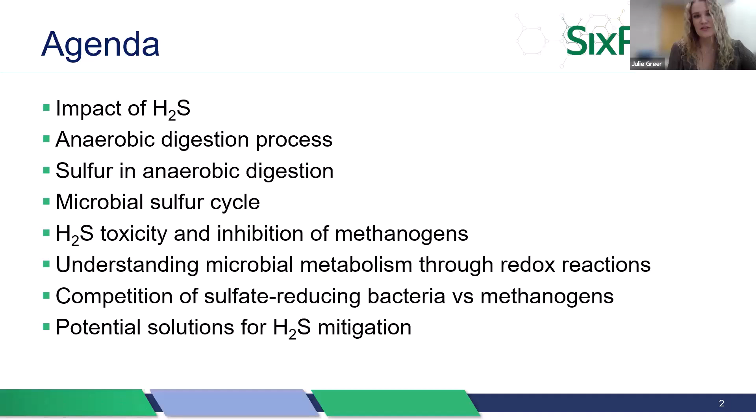So a quick agenda on some of the things that will be covered: a brief overview on the impact of H2S, talking about the anaerobic digestion process from a microbial standpoint, looking at sulfur in anaerobic digestion and how it gets in there. That's going to lead to the microbial sulfur cycle. Then looking at hydrogen sulfide toxicity and inhibition to methanogens, understanding microbial metabolism through chemical reactions called redox reactions, looking at competition of sulfate-reducing bacteria versus methanogens, and then wrapping it up with potential solutions for hydrogen sulfide mitigation.

So a brief overview: hydrogen sulfide in anaerobic digestion is something a lot of us are all too familiar with, for all the wrong reasons. Four major issues come with H2S production. For one, H2S poses significant health risks to both humans and animals. It can lead to severe health defects and death. What really makes it so dangerous is it will desensitize the sense of smell over time, and that's really going to cause long-term damage.

Second issue is corrosion. As hydrogen sulfide gas encounters water within your anaerobic digestion system, it's going to form corrosive sulfuric acid. That's going to damage the actual system itself—pipelines, storage tanks, gas collection systems, turbines. All of that is really going to lead to increases in your maintenance costs.

Thirdly, the odor. While it doesn't seem like as big of a deal, even at lower concentrations, that really pungent rotten egg smell is not so great for the appearance and the way that the biogas is perceived by the public. This really jeopardizes future initiatives to get more RNG projects down the pipeline.

And then lastly is, of course, low gas quality. Having H2S within your biogas lowers its quality and market value. You'll have to spend additional capital to purify it up to RNG, and this is really going to actually lower the energy efficiency of your system.

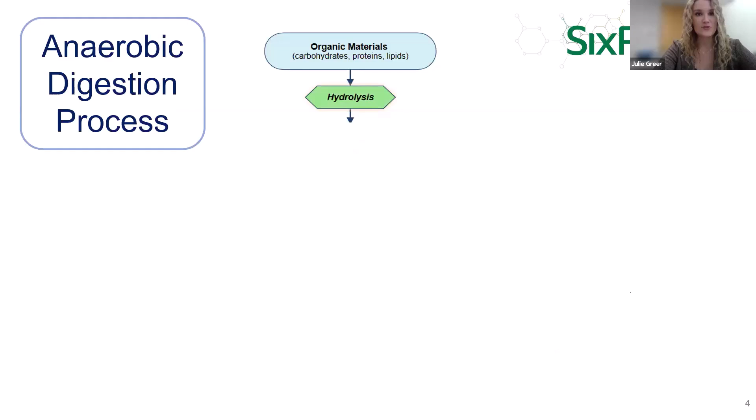These are going to undergo a hydrolysis reaction where they will be broken down further into more soluble organics—things like sugars, amino acids, fatty acids. Your soluble organics are going to undergo a process called acidogenesis, where they will be broken down into acetate, volatile fatty acids, carbon dioxide, hydrogen, and a few other gases.

So from your acetate, you are going to have methanogenesis happen. Methanogenesis is done by a group of methane-producing archaea, commonly misreferred to as bacteria. Acetate is broken down by methanogens, specifically acetoclastic methanogens, to methane and carbon dioxide gas. Now, carbon dioxide and hydrogen can also be converted to methane by another group of methanogens known as hydrogenotrophic methanogens.

So you can really see here that this whole process is linked through a kind of stepwise reaction, and there's going to be all types of microorganisms within this process that are all going to be cooperating and working together.

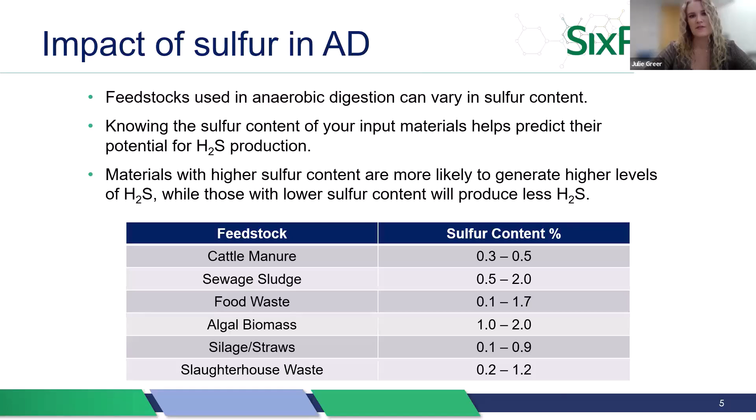So as you input your feed into your anaerobic digester, what you put in can vary in sulfur content, and knowing that sulfur content can help predict the potential for hydrogen sulfide production. Materials with higher sulfur content, like algal biomass, generally produce more H2S compared to those with lower sulfur content, such as cattle manure. This is pretty general—there are a lot of other factors that contribute to that. But overall, you can assume that a higher sulfur content in your feedstock will enhance the activity of your sulfur-reducing bacteria, leading to higher H2S production.

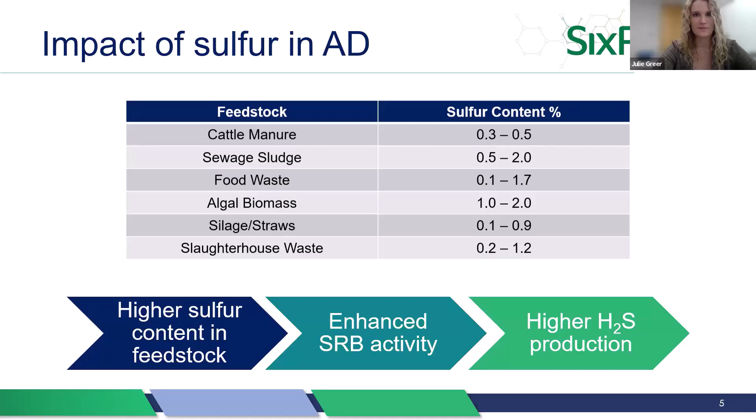So primarily the focus will be today on the SRBs, that second category, just because there is very minimal oxygen within an anaerobic digester for the sulfur oxidizing bacteria. The SRBs are going to be the organisms primarily responsible for your H2S production.

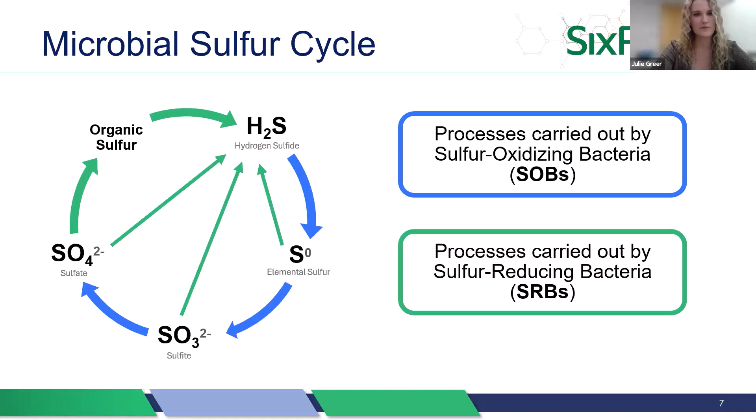Now that we know a little bit about the sulfur, we have to look at why H2S is toxic to methanogens. Methanogenesis is inhibited by hydrogen sulfide, with the degree of inhibition depending on the concentration, the environmental conditions, as well as the tolerance of the methanogenic archaea themselves. But overall, you can assume that more hydrogen sulfide generally means less methanogenesis. This toxic effect comes in a kind of twofold process.

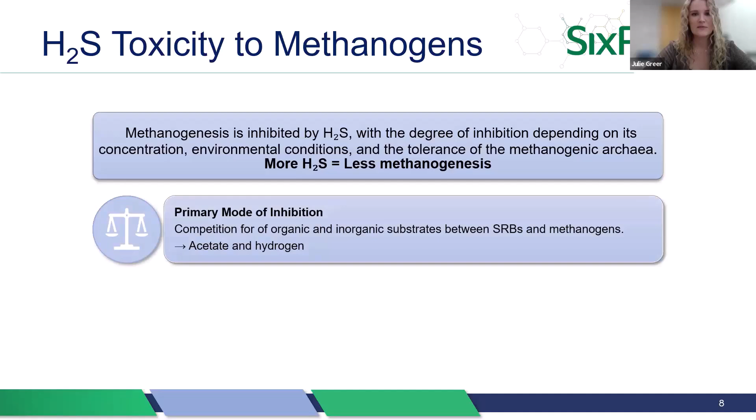The primary mode of inhibition is an actual competition for organic and inorganic substrates between the sulfur-reducing bacteria and the methanogens. These organisms compete for both acetate and hydrogen.

The secondary mode of inhibition is actually from the H2S itself. This molecule is highly reactive and can diffuse across cell membranes. This lowers the membrane integrity of the cells and microorganisms, denatures proteins, and inactivates enzymes. This doesn't just apply to methanogens, but all of the microbes within your anaerobic digester can be affected by this.

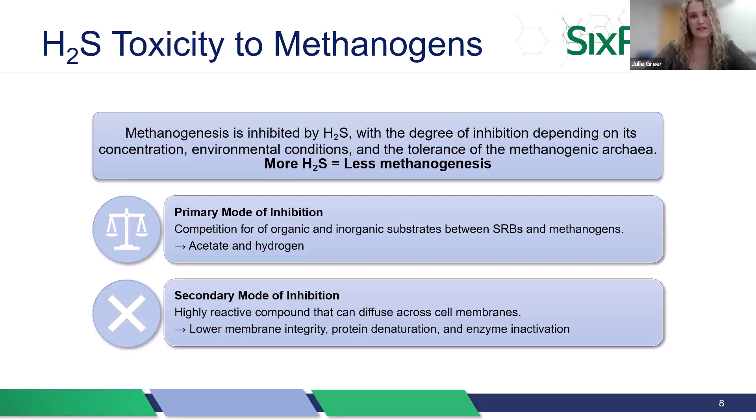To understand a bit more about the competition between sulfur-reducing bacteria and methanogens, we have to go back to kind of a chemistry 101 and look at microbial metabolism and redox reactions. Microbes produce energy through a process called cellular respiration, with reduction oxidation reactions.

When I say respiration, you can think of this almost quite literally. The way that we respire oxygen, you can think of these microorganisms as respiring different types of substrates. These reactions always occur as a coupled set, where one substrate is oxidized and one substrate is reduced. You can see the flow of energy here with those two reactions.

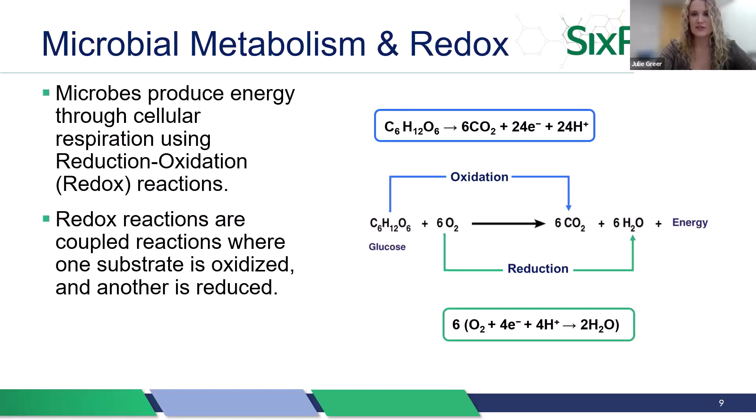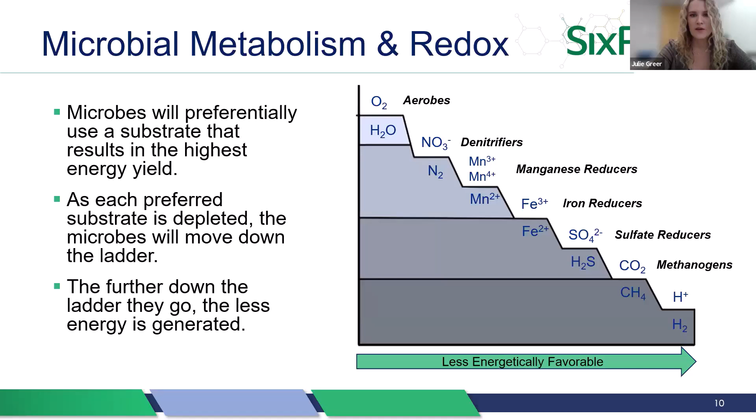If you wanted to put quantifiable values to these reactions, you can look at the redox potential—the energy potential that can be generated from these different reactions through metabolism. Microbes will generally prefer more energetically favorable reactions, using substrates with higher redox potentials, shown at the top here.

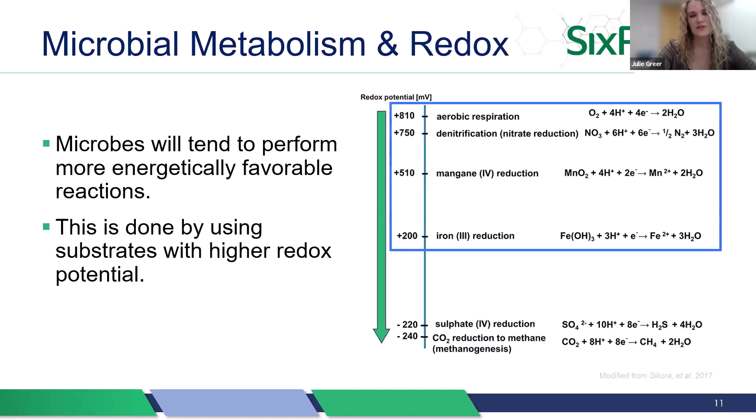That's not to say that the reactions shown at the bottom are not going to occur—they're just less energetically favored. But there are dynamic microbial interactions and different factors that enable these reactions to happen, such as adaptable metabolisms. Microorganisms can actually use different types of substrates, such as nitrate or sulfate, and there's also microbial niche differentiation.

So as one type of substrate is reduced in an area, then the next substrate that's available will be used by a different group of microorganisms.

Spatial stratification is another one. This is not as applicable to, say, an anaerobic digester that is being continuously mixed. But if you have a lagoon digester, for instance, what we'll typically see is zones where there are more of one type of substrate being consumed within that system. So you'll see a nitrate, sulfate, and methane zone.

And the last one is syntrophy. Just as much as these microorganisms are all competing and trying to consume the different substrates, they can actually cooperate together as well. For instance, fermentative microorganisms typically pair with methane-producing microorganisms where they're sharing the energy, so to speak. So the products from one group of organisms can be used as the reactants for another group of organisms.

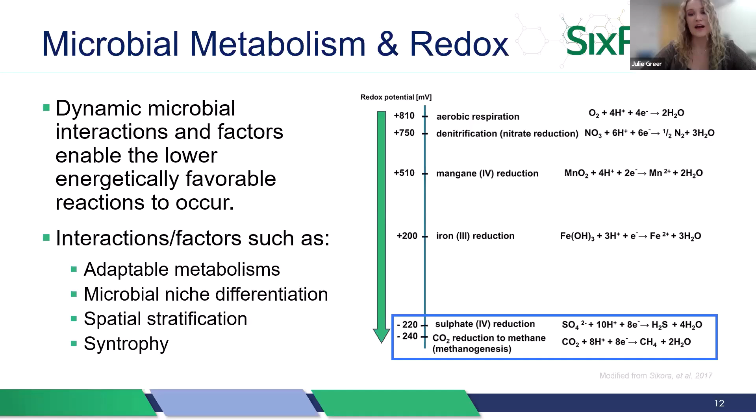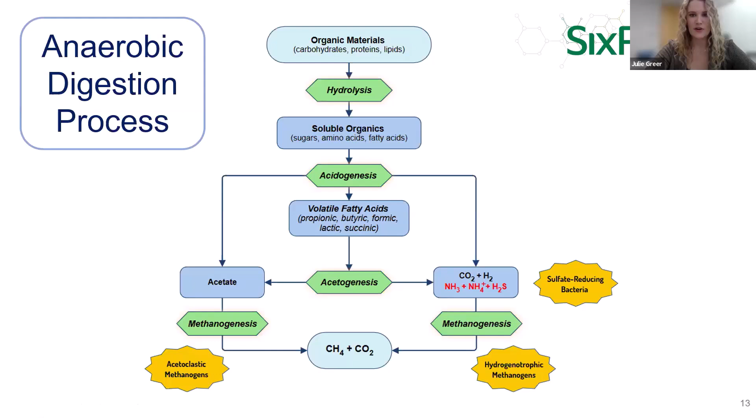So I'm going to bring you back to this anaerobic digestion process. We got a little bit about the metabolism, about the sulfur, and I highlighted earlier that you can see the gases where the H2S production is going to occur and where the methane production is going to occur. So this is where that competition is going to come into play.

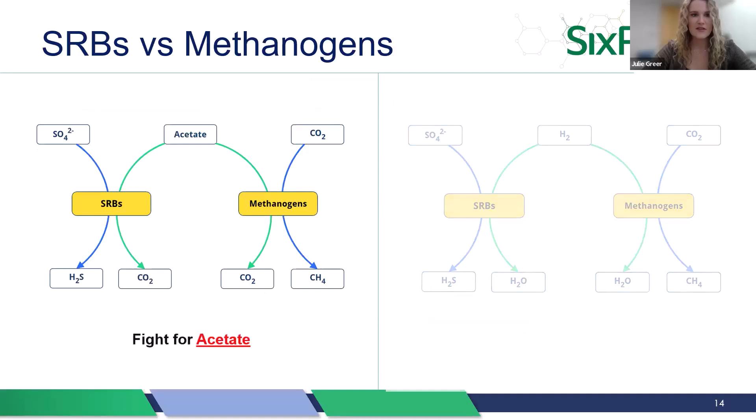I mentioned SRBs and methanogens will compete for different organic and inorganic substrates. Looking first at acetate, both methanogens and sulfate-reducing bacteria can use acetate as a carbon source. The SRBs are going to use it and it's going to be converted to CO2. The methanogens will use it to convert it to CO2 and methane.

Now the SRBs do have that leg up, so to speak, because they do have a more energetically favored reaction that's coupled with the acetate breakdown. And that is why they're going to outcompete the methanogens, so to speak.

Now the other reaction is through inorganic substrate competition, and this is going to be a fight for hydrogen. Similarly with the acetate, the sulfate-reducing organisms are going to have the hydrogen conversion to water coupled with the conversion of sulfate to hydrogen sulfide. And that reaction is going to be more energetically favored as opposed to the methanogens that are going to be coupling it with the conversion of CO2 to methane.

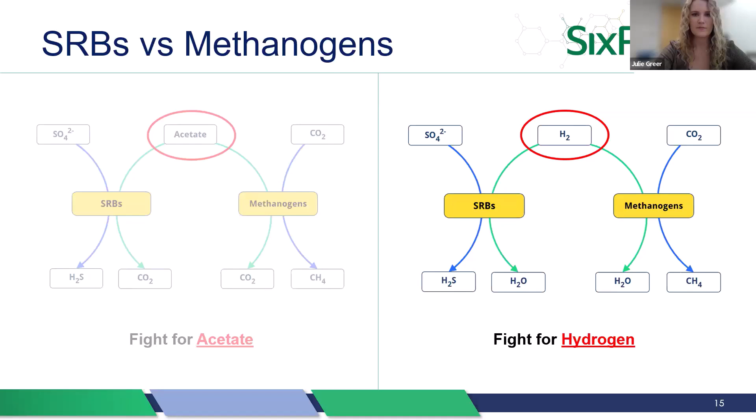So looking at all of this and what we can do about it, there's a few different options, starting with pretreatment. The first one being very obvious, we're going to avoid feedstocks with a higher sulfur content. Things like algae, grasses, silage, and straws typically do have more sulfur in it.

You can also do pretreatments of your feedstock to remove the sulfur compounds, things like acid and alkali treatment, oxidation pretreatment as well.

There are processes we can do during the anaerobic digestion to minimize the H2S, so maintaining neutral pH. It seems relatively simple, but methanogens are extremely sensitive to changes in pH, whereas something like sulfate-reducing bacteria is actually a lot more tolerable to, say, a change in the pH down to an acidic condition.

You can also increase the hydraulic retention time of your system. Because methanogens do have that less energetically favorable metabolism, they grow at a much slower rate than sulfate-reducing bacteria. So if you have too short of an HRT, it may not allow quite enough time for the methanogens to produce that methane.

You can introduce additives like iron scavengers that are going to react with the H2S. However, this could be introducing another problem in itself, because if you remember from earlier with that substrate ladder, iron is one of the substrates that microorganisms can use. So you might be introducing another problem while trying to solve one.

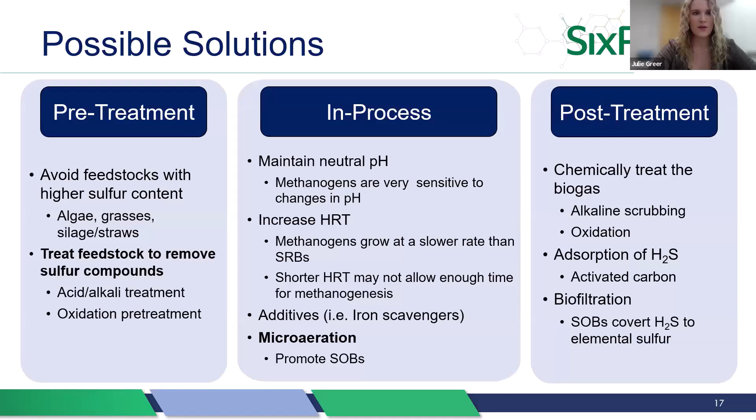So pre-treatment is something that we actually do here at SixRing. We take waste biomass, things like agricultural waste and forestry waste, and put it through a reaction that we call a delignification. This takes the biomass and breaks it down into two primary constituents, one of which is a very high purity cellulosic product that we call stimulose.

And the other is a liquid product that we call LHDO, or lignin hemicellulose depolymerized organics. Now the beauty of these two products is you can use both the cellulosic product and the LHDO, which can actually be upgraded to bioplatform chemicals.

So if you were to start with something like canola straw that has a sulfur content of 0.35%, and put it through this delignification process, you get this very high stimulose product that actually has a sulfur content of 0%. So you're effectively removing the sulfur and preventing a lot of that activity from the sulfur-reducing bacteria. Now, a lot of biomass pretreatments typically involve high temperature, high pressure reactions, but the beauty of our technology is it occurs under ambient conditions, room temperature and pressure.

And the chemistry that we use, we actually recycle all of the chemicals.

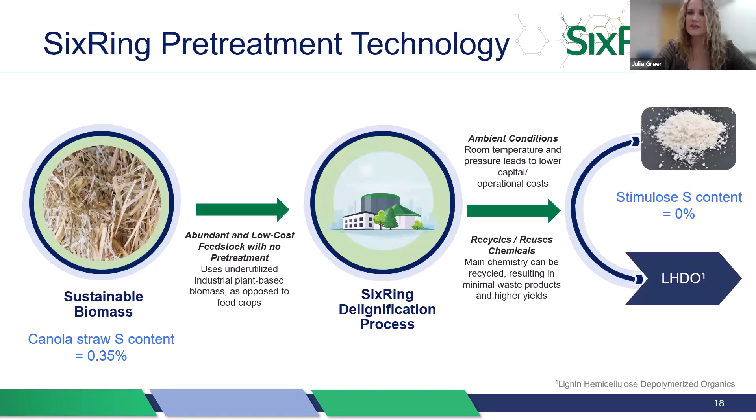So going from 0.35% to 0% might not seem like a significant change, but when we tested this in a 20-liter scale reactor, we noticed there was actually a decrease on average of 54% lower hydrogen sulfide concentration in this test reactor compared to the control, when we replaced an equivalent amount with the stimulose compared to canola straw.

Now, the beauty of this as well is you have a very high purity cellulosic product, and that's going to be a very readily bioavailable carbon source for the microorganisms. And when we observed this hydrogen sulfide decrease, we actually noticed also an increase in the methane volume production in the test reactor compared to the control.

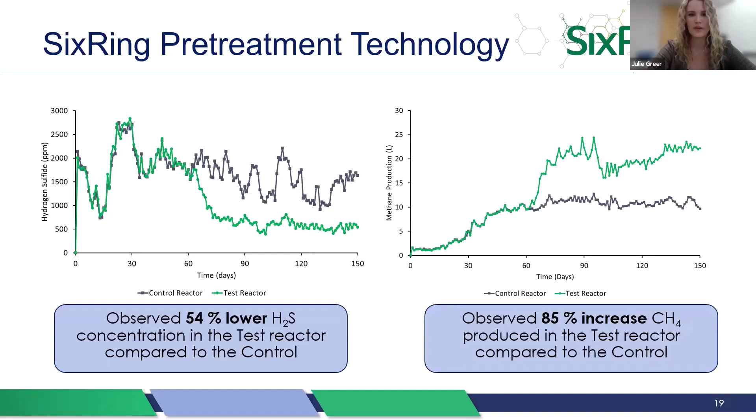So the last pretreatment I wanted to briefly touch on was microaeration. This is not something we do here at SixRing, but it is one of the few solutions that really tackles the root of the problem by looking at the redox and metabolism of the system. Introducing very tiny amounts of oxygen will inhibit the SRBs from reducing sulfate to H2S based on that redox ladder, and it will actually promote the sulfur oxidizing bacteria to oxidize the H2S to elemental sulfur.

Now, this method is very tricky because there's a very small window in which the conditions are optimal for the sulfur oxidizing bacteria, where your pH needs to be pretty much perfectly neutral, between 6.5 and 7.5. And the overall optimal redox potential of your system, which you can measure with an ORP probe, needs to be negative 250 millivolts. So it needs to be a very highly reducing environment.

The injected oxygen that you're inputting needs to actually be immediately consumed, so the anaerobic conditions are maintained. If you inject too much oxygen, you're going to cause a lot more damage to the microbial community. So that does make this treatment an operational risk factor, but it is one of the few solutions that really tackles the metabolism and redox of the system.

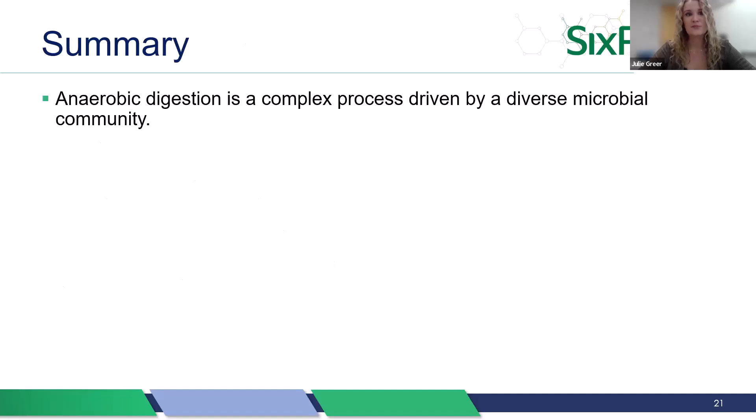So just to summarize everything I went over: overall, anaerobic digestion is a complex process driven by a very diverse microbial community. Microbes work in synergistic interactions where the products of one group serve as substrate for the others, and this is what enables efficient organic matter breakdown and biogas production.

There exists a competition and a cooperation between the different microbial groups, and this balance of competition and cooperation is going to determine the composition of your biogas.

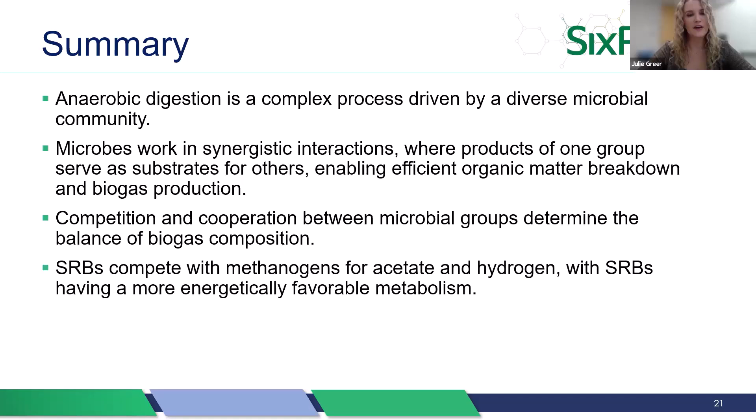Sulfur-reducing bacteria in particular compete with methanogens for both acetate and hydrogen, and SRBs have that more energetically favorable metabolism, which really gives them an extra boost and more favoritism in terms of producing hydrogen sulfide over methane. And lastly, and probably most importantly, understanding the biological processes behind hydrogen sulfide production is going to help identify its root causes and develop targeted solutions to mitigate the effects on anaerobic digester systems.

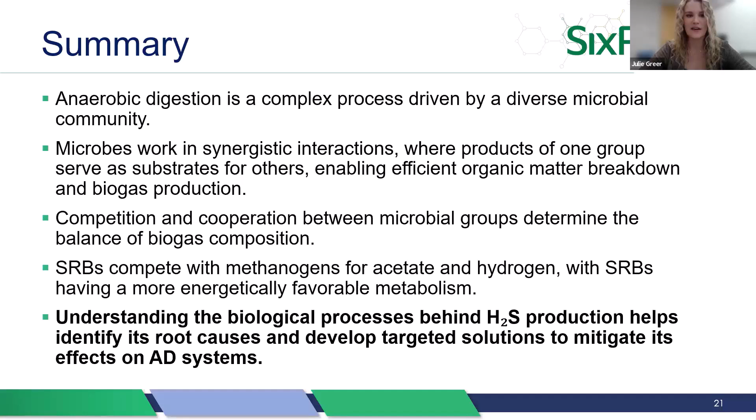Appreciate it. Awesome job. I'm still amazed the more I learn about what happens when you put sulfur into a reactor. I used to just think it was an H2S scrubbing problem, but the notion of it being something that reduces your biogas yield because the SRBs are soaking up all that carbon - I'm still wrapping my head around all this. So great job. Thank you.

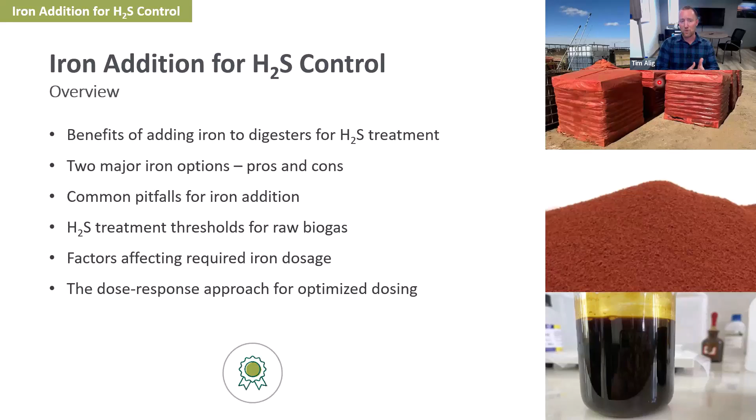But also cost efficient - we don't want to overdose a bunch of iron, not only for cost reasons, but also potentially, if it's bad enough, for chemical reasons as well. So dose response, going to talk about that a little bit. And then the major iron solution that Planet provides for in-digester H2S treatment is MicroNOX ON16, a micronized powder that's very effective when it's applied the right way.

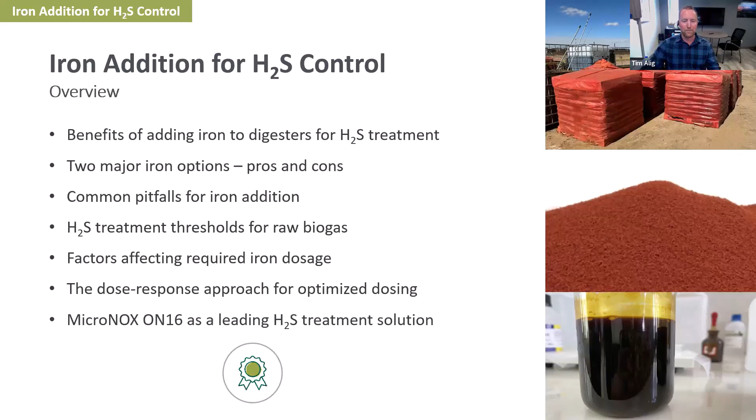Starting with why - the big thing is it's treating H2S generation at the source. As Julie pointed out, we have that sulfate transition to H2S in the digester. We want to have a good capacity to reduce H2S in situ in the digester so we don't have quite as much work downstream with carbon tanks, biological desulfurization, and chemical desulfurization after the digester gets going. So very important for many people out there.

It really just makes sense to treat H2S effectively in the digester before taking a lot of the remaining H2S downstream of that. It can prolong the life of equipment, especially stuff that's susceptible to H2S corrosion or that sulfuric acid corrosion that Julie mentioned - activated carbon and other media, we want to prolong the life of those. We can very quickly burn out things like activated carbon if we don't keep H2S levels under control in the raw biogas. So huge value there, treating H2S at the source.

Biological health - a lot of this comes back to what Julie mentioned, she did a great job talking about this aspect. H2S toxicity is a really, really big one, and there's also this ongoing balance between the sulfate reducing bacteria (SRB) and the methanogens over time - it's just this constant war in the digester. So we want to bind sulfur, we want to treat H2S, we want to keep those methanogens very happy so they don't have a difficult time keeping up with the SRBs, which could win the war from time to time and create these big blooms, these big spikes in H2S.

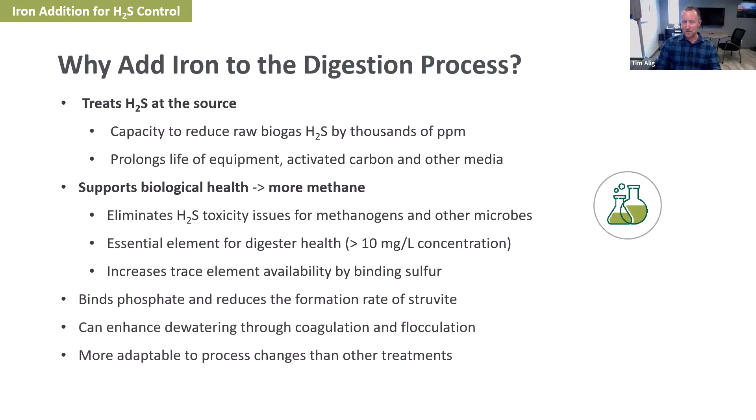For people with struvite formation issues, which can be a huge pain point for clogging pipes and equipment, iron can bind phosphate and reduce struvite formation, so that's a big value add. It can also enhance dewatering through coagulation and flocculation in certain applications. And it's potentially more adaptable to process changes than other treatments, since it can be dosed at a varied rate to keep up with H2S in a timely fashion.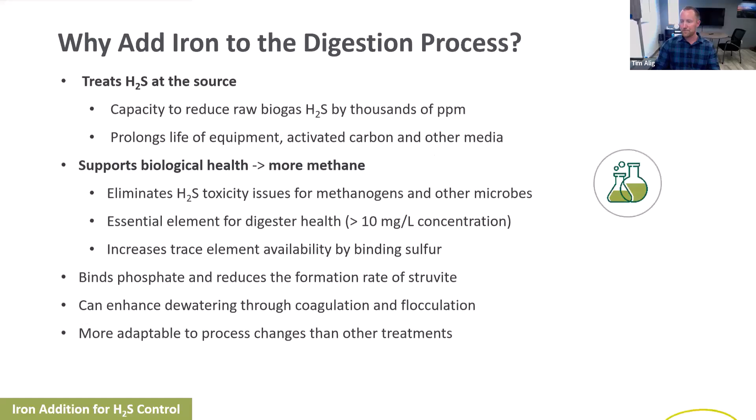The first solution I'll highlight is ferric oxyhydroxide, also called ferric hydroxide or iron 3 hydroxide. This comes as a ferric-rich powder or granular form, added either upstream or directly to the digester.

Pros of this one: it's not corrosive and safe to handle. There's potentially some powder and stain risk, so you want to be careful not to breathe it in, but otherwise it doesn't have corrosive risk like ferric chloride. You can apply it by hand in controlled amounts, or by machine if you have a good mixing system and good ability to inject it in a dosed form.

Another big point is it has a moderate reaction rate. It's not initially soluble, it's kept in suspension in the liquid or substrate. Over time, keeping that moderated iron concentration in the digester helps buffer against H2S spikes that could pop up as certain feedstocks come in, or with sudden changes to the biology that result in increases in H2S.

On the con side, it's really important to keep it mixed into suspension. Many folks have had issues with it dropping out if they add it way upstream of the digester, like into a big stagnant manure pit or other liquid pits that don't get mixed well. It has some weight to it and is not initially water soluble. It will eventually solubilize and react with sulfur, but you need to keep it in suspension until it has a chance to react with sulfur in the digester.

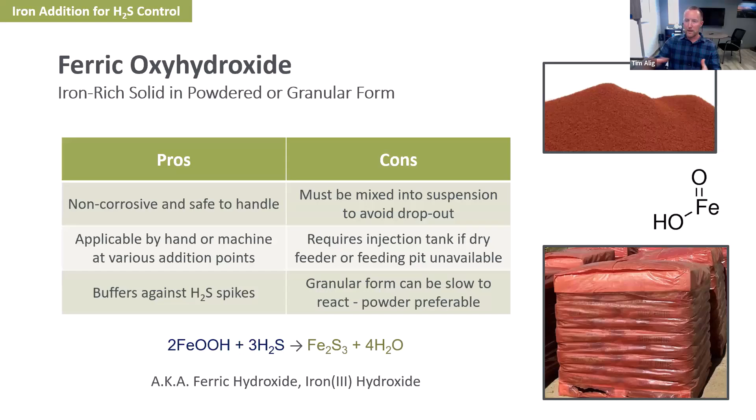So it's very important to have the right equipment, or at least the right addition point, to make sure it's effective in the digester. A dry feeder or feeding pit right next to the digester can be a great way to get this powder or granules in. You'll need a dedicated, at least small-scale, mixing and injection tank specifically designed to get that ferric oxyhydroxide into the digester. The granular form can be slow to react depending on the surface area to volume ratio of the iron, so oftentimes a powder is preferable—the increased surface area improves the chance it gets effectively transferred into the digester and reacts with sulfur there.

Ferric chloride is a very common treatment. On the pro side, it reacts very quickly with H2S and is very soluble in water or liquid, so as a liquid solution it's ready to inject.

The big con to really highlight is the corrosion risk. A lot of safety equipment is required to do this well—things like eye wash stations, safety showers, and good chemical containment in case it spills from its IBC tote or leaks from plumbing. You need to be very careful and think preemptively about what this looks like in a biogas plant, because we've seen major leaks that were a huge pain point to clean up, with some safety hazards associated. You really need to manage the corrosion from the acidity, since it forms hydrochloric acid when mixed into solution—so keep that top of mind and have good equipment and forethought around it.

There's a cost, of course, associated with that. And I mentioned the spills and leaks can be a major safety issue. But this one can really make sense in certain applications, especially if you need just kind of a ready to go liquid dose for certain applications.

Common pitfalls: I mentioned that risk of adding too far upstream. Ferric chloride can precipitate out, form different precipitates with chemicals, depending on the pH and what's contained upstream of the digester. So you can lose ferric chloride upstream. You can also lose ferric oxyhydroxide if it happens to just fall out of suspension, if it's not mixed well, if it's not pumped well.

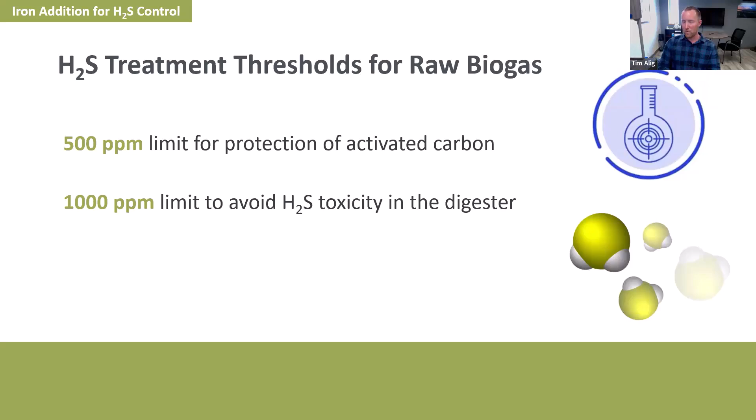Dosage range, this is as far as just in the form of ferric iron atoms, so 1.3 to 4.5 pounds for every pound of H2S. Any supplier of a product, whether it's ferric chloride, ferric oxyhydroxide, etc., should have some type of recommendation for what that dosage rate of their particular product is for a given amount of feedstock or a given amount of sulfur or H2S. So start there, definitely start with that recommendation, and it will definitely need to be adapted to your particular system, but always seek that information early rather than late. Try to get at least some recommendation for what that dosage rate should be for your particular substrate and system design. Manure is often going to require more iron than other substrates.

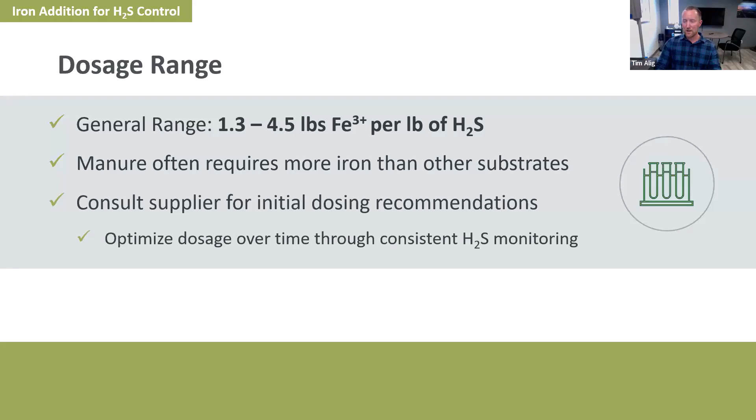Julie got into this a little bit, but there's definitely exceptions. There's going to be substrates out there that just have a heck of a high sulfur content. Could be local farming conditions, could be the domination of certain substrates in that overall feedstock. But you'll often see a little bit higher requirement on average for manure with high sulfur coming in. And as I mentioned, contact the supplier for initial dosing recommendations, and what I'm going to get into next is optimizing that dosage after that starting point.

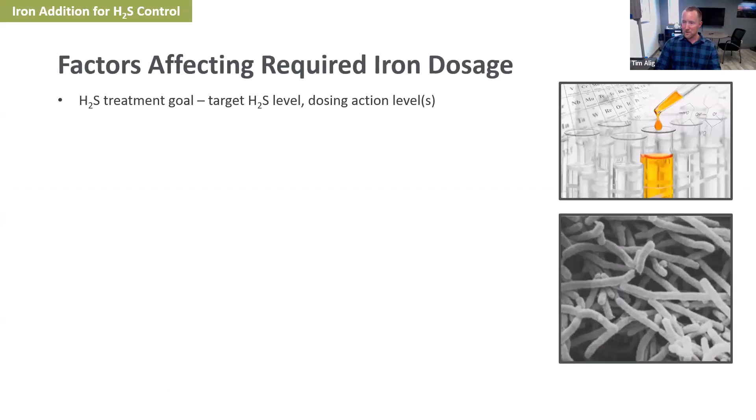Factors that affect that required iron dosage: we have that treatment goal, this is going to be facility dependent. What are we trying to achieve with H2S treatment? The form and concentration of iron, how effective it is at the particular location that you're adding it at. Want to make sure that we're getting it into the digester effectively, but if we're not, that could greatly expand the amount of iron required to get it in and reacted with H2S. And then that mixing efficacy at the addition point within the digester.

Substrate quality and feed rate, we could see some H2S formation lag behind that initial feeding. It does take time for sulfate to form and get converted into H2S in the digester, so there's a time factor there. pH, kind of that equilibrium between H2S and other forms of sulfur. Temperature, including the stability of the temperature. Plenty of cases where you have temperature fluctuating in the digester and the methanogens are not as happy. The sulfate reducing bacteria can outcompete in certain cases, so that will affect how much H2S forms and how much iron is required.

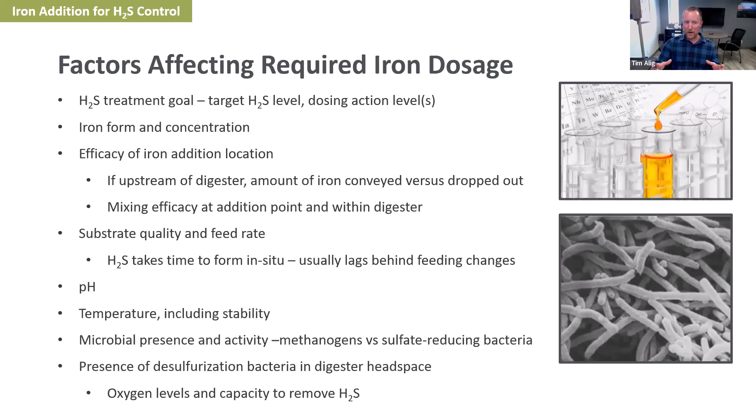Microbial presence and activity, again, that population of methanogens versus sulfate reducing bacteria. Presence of desulfurization bacteria in the digester headspace. This is part of that micro-aeration, at least one option as far as micro-aeration solutions that Julie mentioned. So we might need to figure out how much do we want to treat in the digestate versus in the headspace.

Big star highlight on this one, this dose response approach. So I mentioned starting with that recommended dosage with some good consultation, a little bit of research on how much we should approximately start with for our new system here with its given substrate, its given conditions, the maturity of the digester, how far along it is with its microbial health and methanogen activity. So we're going to start with that estimated iron dosage. We want to keep it steady. We're trying to build some data here to see what is the actual response of H2S to this sustained iron dosage.

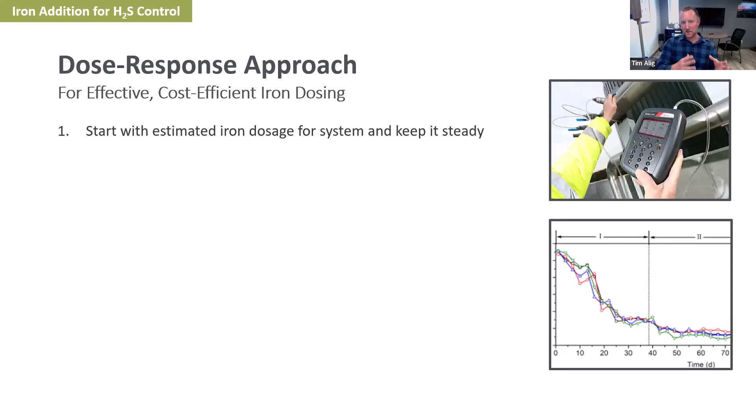To make that happen, we need to make sure we have at least daily measurements of H2S, at least daily measurements of iron addition, in addition to other health parameters like pH, temperature, methane. We really need some kind of, hopefully a one-page review or nice overview of what's happening day to day in this system and what's that dose response effect between iron and H2S. So we need some kind of data compiled somewhere we can look at all this together. We want to gradually adjust that nominal dosage rate over time. It's going to be a gradual effort until that H2S is right at or right below that target level. This is kind of the interest, both catching that H2S and making sure we don't have cost efficiency issues. And we want to continue to record H2S levels and iron treatment quantities daily.

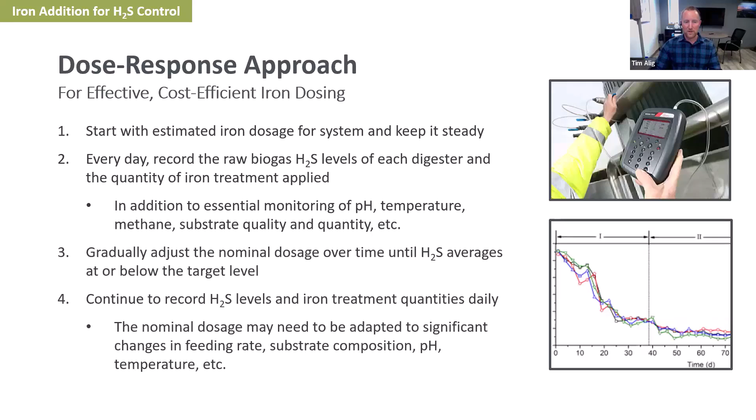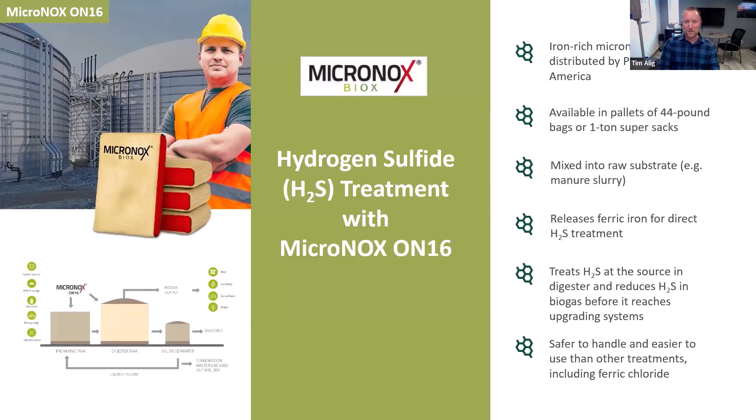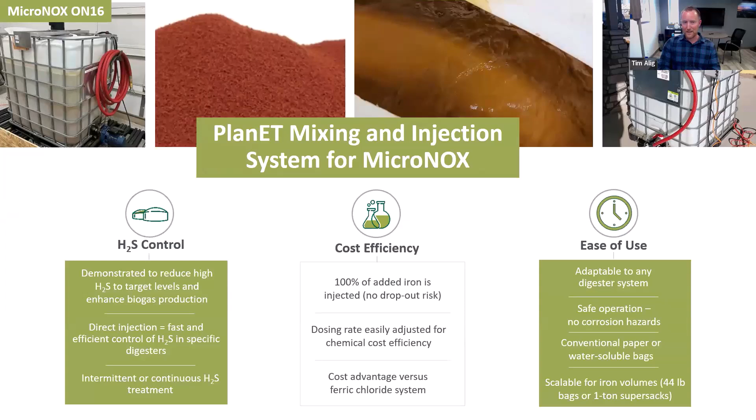One of the really exciting things we've got recently is we've released our own version of a mixing and injection tote for direct injection either into manifolds or directly into the digester. We can really work with your specific system design to make this a good, effective solution for your particular system. So please do reach out.

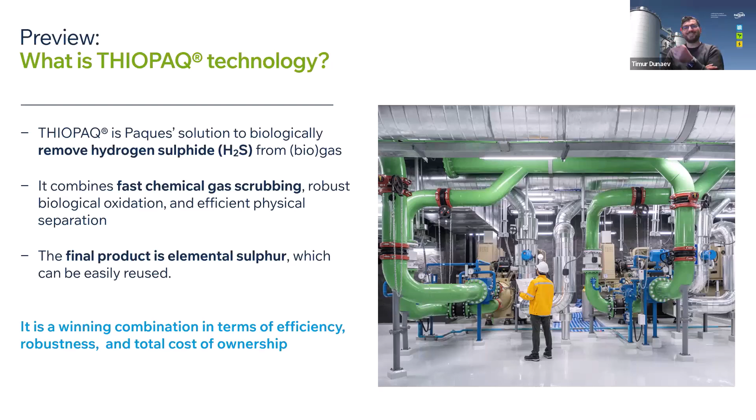The THIOPAQ technology was developed by Paques in the late 90s, and since then has been implemented throughout the world. We use a two-step approach: the first step is basically chemical scrubbing of H2S from biogas. The second approach, probably the most important core of this presentation, is the biological regeneration of the caustic, oxidizing sulfide once it's bound into solution in the chemical scrubber, into elemental sulfur. That's then a stable product that can be used in many different ways.

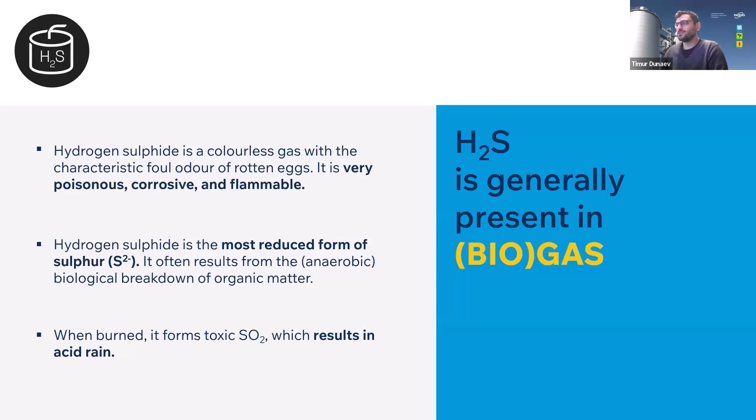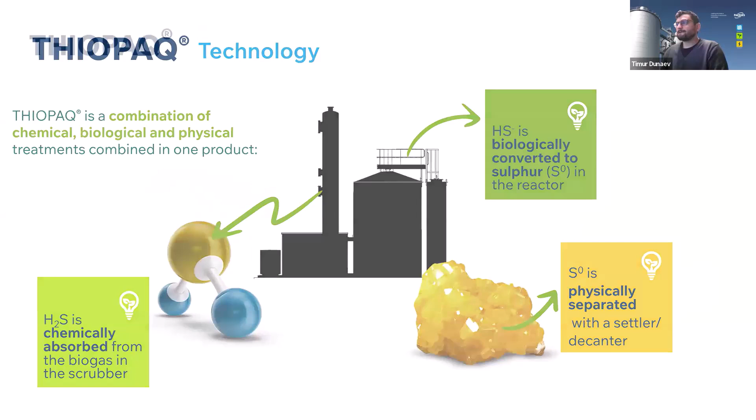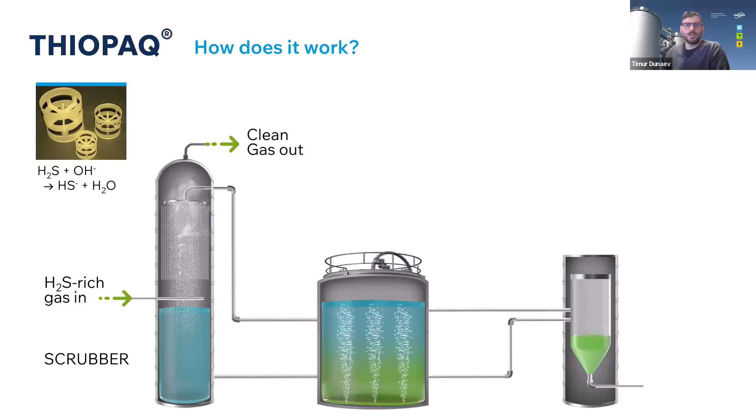The THIOPAQ technology is basically a three-stage approach. In the first one, what we have is a scrubber, and the entirety of the removal of hydrogen sulfide from your biogas happens within the scrubber itself. It's a countercurrent, free-flowing packed media scrubber where you're creating large surface area to generate effective mass transfer from the gas phase into the liquid phase, under elevated pH conditions, resulting in treated biogas coming out from the scrubber.

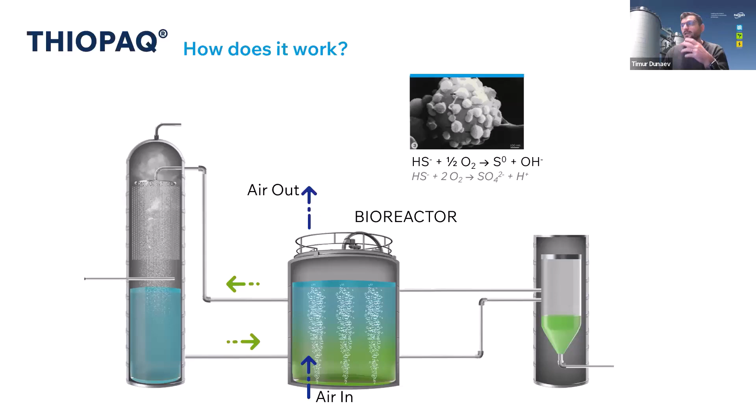Once the sulfide is binded into sodium sulfide, it gets transferred into the bioreactor where we create anoxic conditions, keeping the ORP relatively low, let's say at negative 350, generating mixing and limited oxidation in order to convert sulfide into elemental sulfur. In that process, the sodium and the hydroxide ion are released back into the system and can be reused and recirculated to continuously scrub your biogas from H2S.

Then the elemental sulfur is removed from the system, and we have many different approaches for removing the sulfur slurry depending on the size and loading. You can use conventional settlers, lamella separators, and in larger systems even decanters to take out the sulfur as a concentrated sulfur slurry cake.

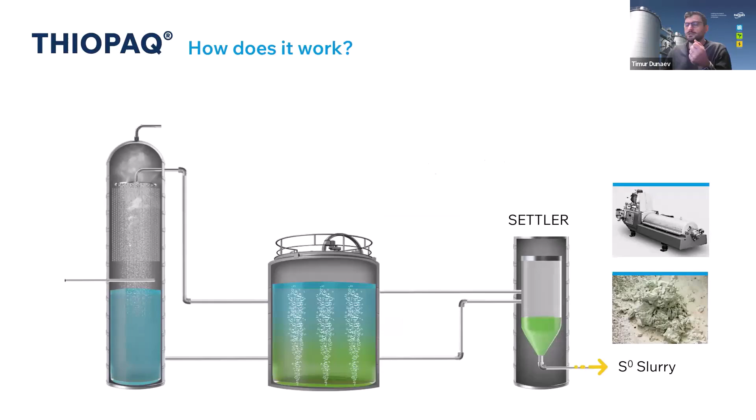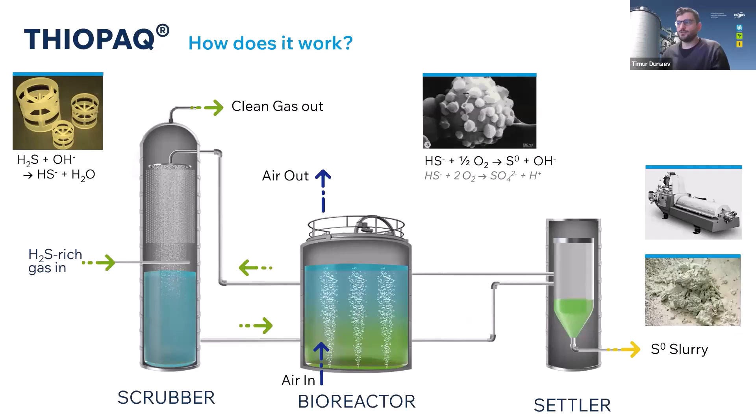This is an overall picture of the step-by-step process, but every single time you see a THIOPAQ, the core of it is going to be basically the two vessels of the scrubber and the bioreactor, plus the ancillary equipment related to it.

In the field, besides that, we are providing fully skidded or fully containerized systems where we combine the ancillary equipment I mentioned - recirculation pump, instruments, controls, your HMI with the SCADA - all together inside of it. So it can be part of an existing building, or if it's a separately standing system, it could be fully containerized.

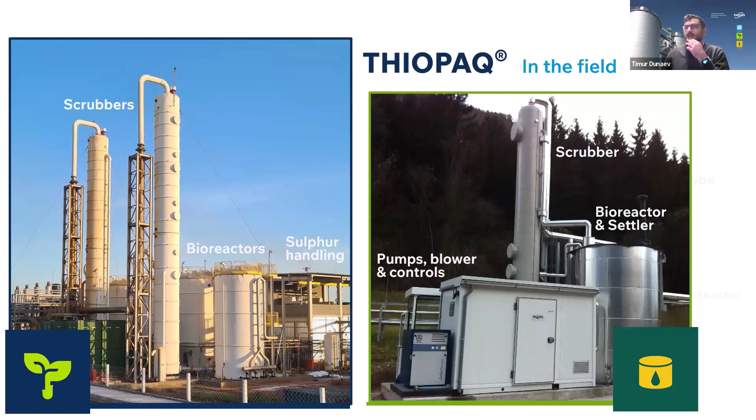Since the microorganisms are naturally occurring, there is no need to bring new catalyst into the system - the biocatalysts are self-growing and self-regenerating. So the only thing necessary is a relatively small amount of water to keep the TDS, or the conductivity of the solution, below the saturation point, and a relatively small amount of caustic that needs to be added, disproportionately smaller than what you'd use with an exclusive chemical scrubber, because caustic is continuously regenerated.

You just need to supplement a little bit that will be coming out with the sulfur cake and the rest of the solution.

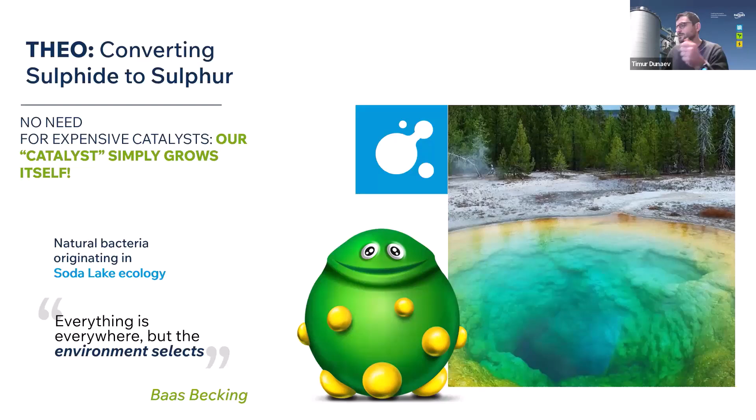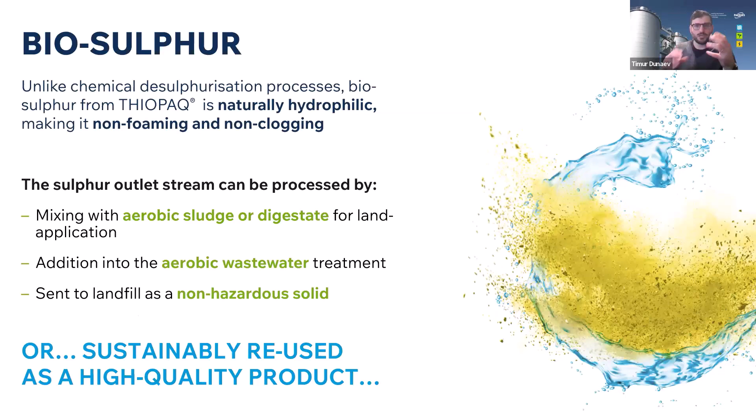The sulfur that is produced is biological sulfur in the elemental form. It's completely stable - actually, once converted into elemental sulfur, it's one of the harder pathways to convert back to sulfate or sulfide because of the stability of elemental sulfur. So what you get is a very stable, odorless slurry of elemental sulfur together with some microorganisms. It's non-hazardous and could be disposed of in many different ways.

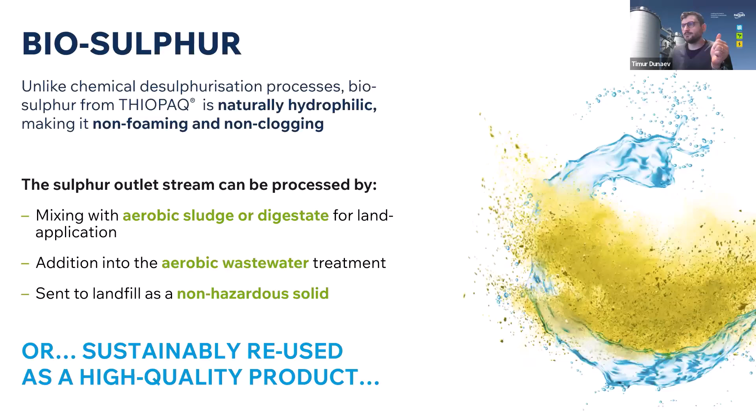The advantages of the THIOPAQ are extremely high removal efficiency - I'll show some case studies - but we can consistently meet less than 25 ppm of H2S, even with extremely high H2S coming in. We're talking about, in some oil and gas applications, concentrations of up to 30% H2S in the gas flow.

Very low operational costs, because the caustic consumption is only there to replenish what's coming out with the sulfur cake and the makeup water. Very high quality biogas, with no additional oxygen addition, because the entirety of oxygen is added inside of the bioreactor - so you're not adding oxygen in your chemical scrubber, which is important for some RNG systems. And an extremely high uptime at 99%, because there are only two important moving parts there, both of which could come in duplicates and triplicates depending on the sensitivity of the project: the recirculation pump that recirculates the liquor around the scrubber, and the blower that provides oxygen inside of the bioreactor.

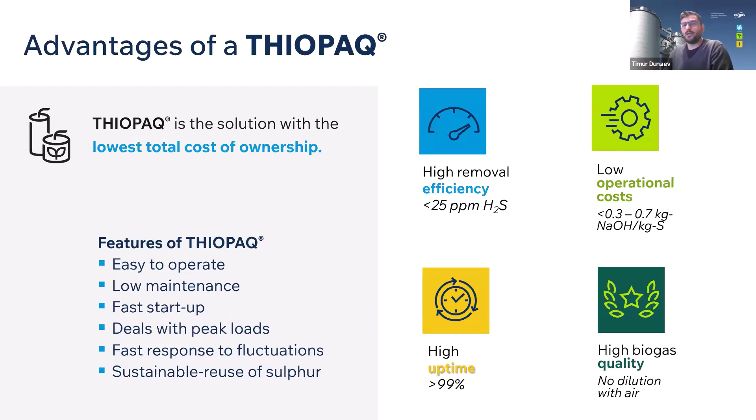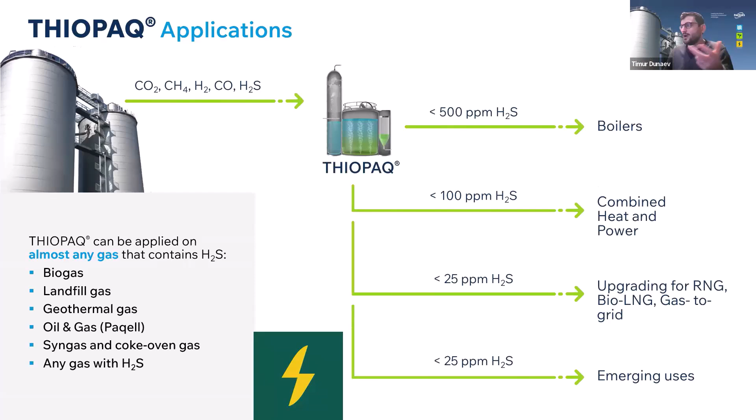The applications are very versatile, and we can control the effluent H2S from the system by properly designing the column. But as I said, we can go as low as 25. Depending on what you're using it for - boilers, CHP, RNG, or other uses - we can go as low as less than 25 ppmv.

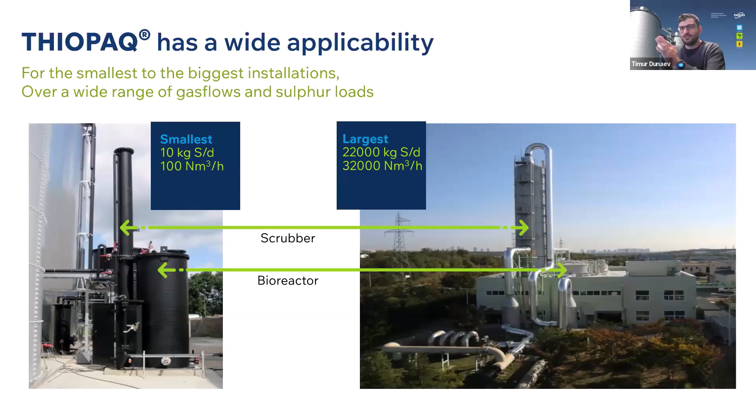As you can see, that biogas scrubber is massive, and actually the bioreactor is a massive built-in bioreactor - so instead of a modular system, it had to be built on site. The versatility on sizes is quite impressive with the THIOPAQ technology.

We have standard sizes and designs, with flexibility on the skidding and installation. Most of the time, for the RNG applications here in North America, we literally deliver not more than 3 large parts - bioreactor, scrubber, and a container or skid - and all you need to do is mount them and provide interconnecting piping, and everything else is basically done.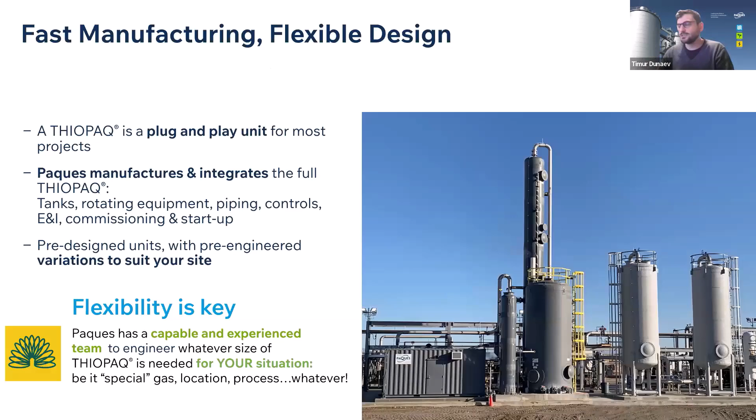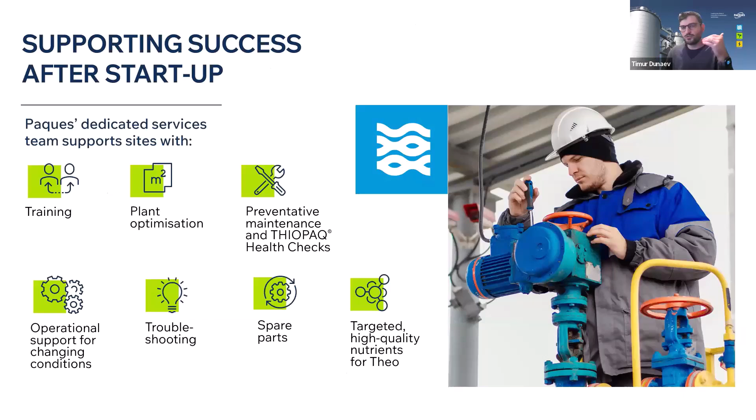The North American business unit is a self-functioning business unit with full project management services and support, so we can provide continuous monitoring, troubleshooting, and support post-project delivery as well.

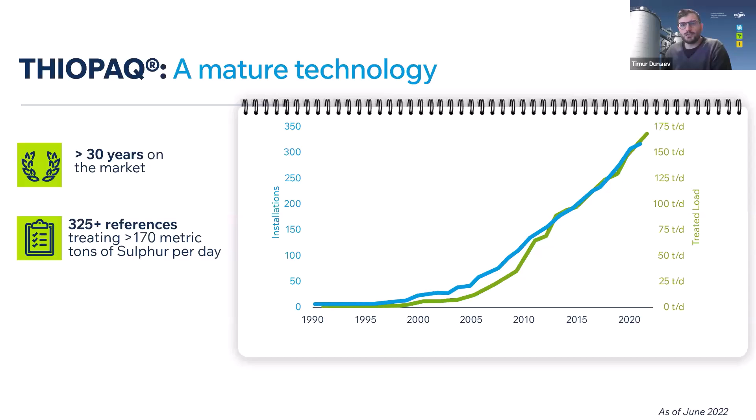As I summarized in the beginning, this has been over 30 years in the market. We have more than 325 active references, with more than 60 references in North America, the majority of them in the RNG sector here in the United States.

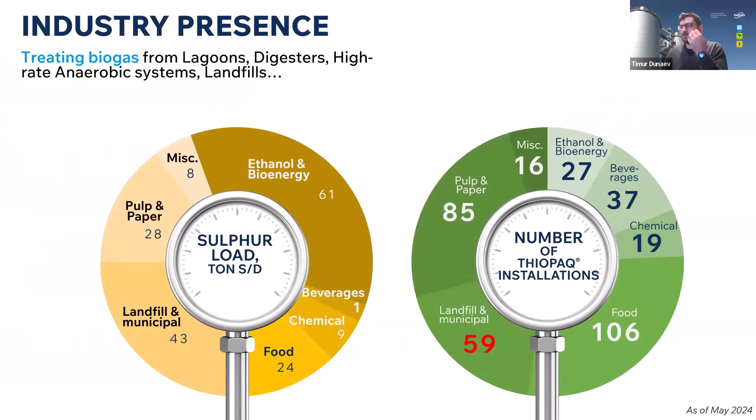Worldwide, the installations are in very different places, and I'll go over a few examples, but I think the most pertinent ones are landfills and RNGs here in North America.

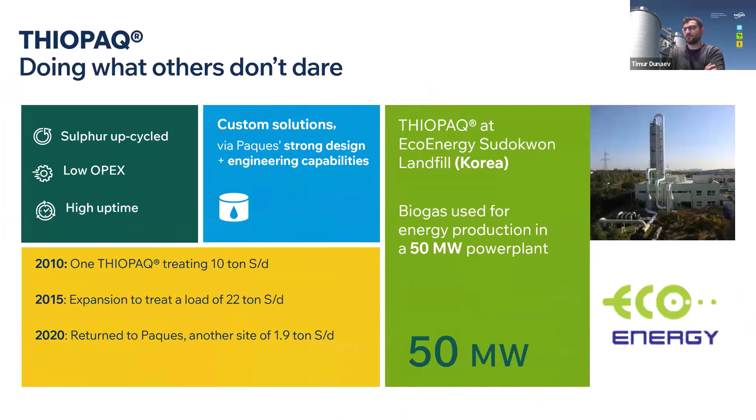Here is a landfill application in South Korea, 50 MW landfill gas, and that's the biggest installation we were talking about - 10 tons of sulfur per day, in full operation since 2010. There are a lot of published scientific articles on this installation out there, together with Eco Energy.

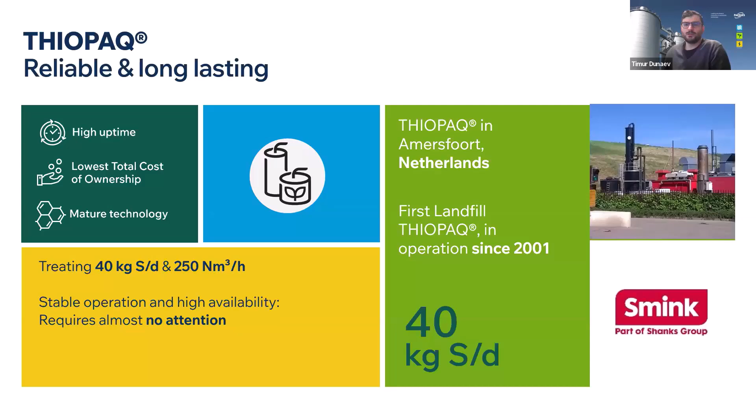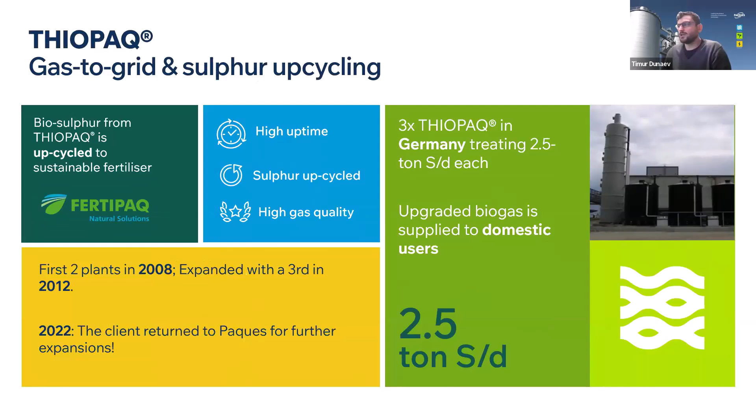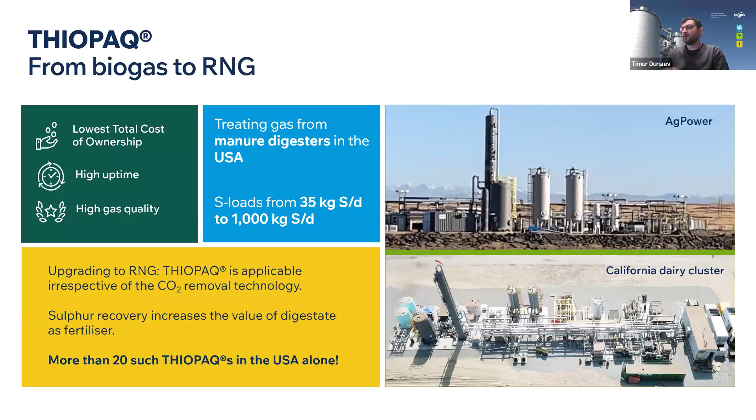And here's a beautiful example from the United States. There's a California digester, a cluster of digesters delivering RNG, continuous operational loads from 35 to 1,000 kilograms of sulfur per day.

I think we're actually on time, so I'm not going to spend more time summarizing things. That was good, and I saved about 3 minutes to give a little bit of time for questions. Thank you.